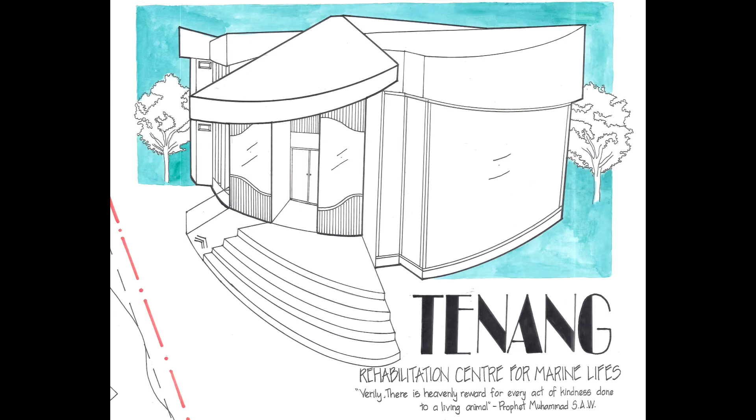The name Tenang Rehabilitation Center for Marine Life is chosen to represent the site content itself, as it's very calming and serene for us to visit and care for endangered marine life such as turtles. Based on what Prophet Muhammad has said, verily there is heavenly reward for every act of kindness done to a living animal.

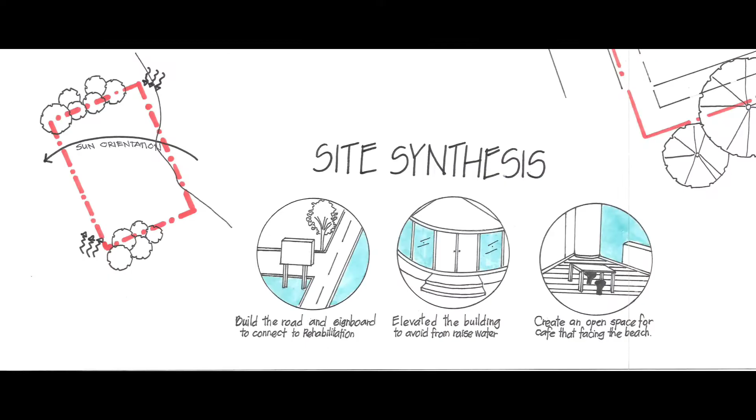Moving on to the site synthesis, as our site is in a rural area, I suggest building the road and signboard to connect to the rehabilitation center. Next, elevate the building to avoid rising water damage, as our site is near the beach. Then, create an open space for a cafe facing the beach to get the beautiful scenery.

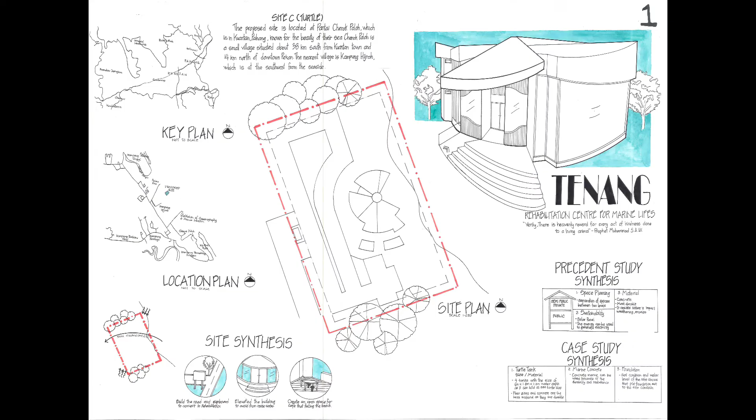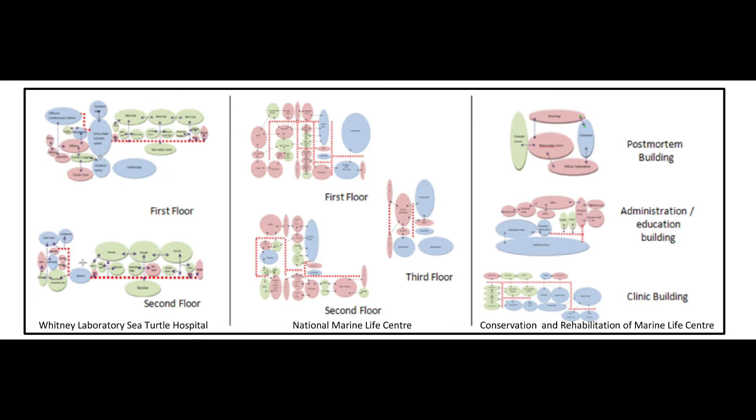Moving on to the precedent study synthesis, based on 3 buildings I've studied, which are Whitney Laboratory Sea Turtle Hospital, National Marine Life, and Conservation and Rehabilitation of Marine Life Center, I came out with 3 syntheses. Firstly, on space planning, separation of space between 2 levels, where public space is on the ground floor and semi-public and private space is on the first floor. This is needed because of privacy.

Secondly, in terms of sustainability, solar panels can be used to generate electricity. Then, for the material, concrete can be used because it is most durable and resists nature's impact.

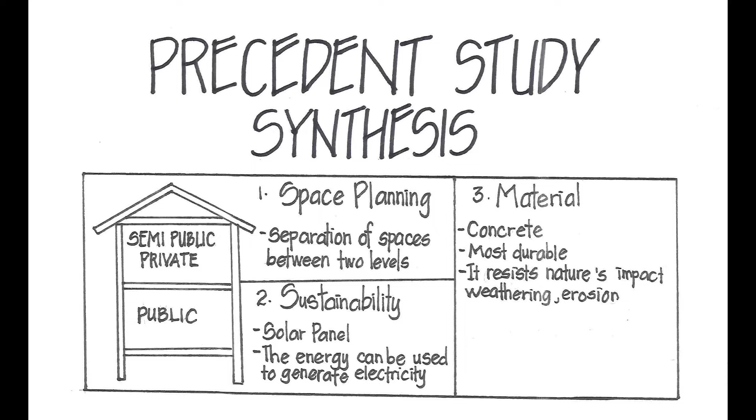For the case study synthesis, firstly, on the turtle tank size and material, I found that 4 tanks with the size of 6 meters by 1.8 meters by 1.2 meter water depth can hold all sea turtle sizes, and fiberglass and concrete are the best materials as they are durable.

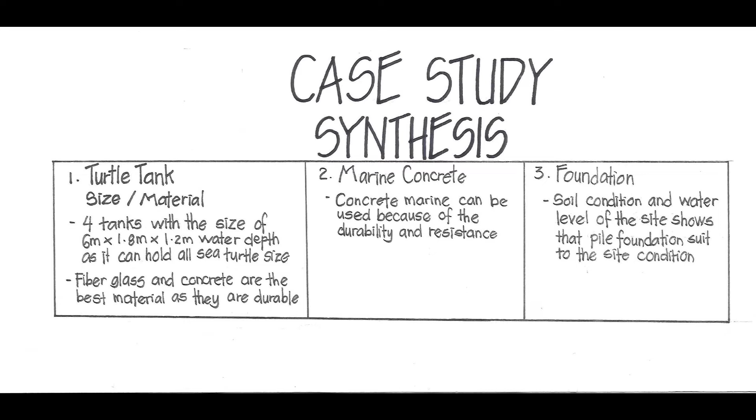Secondly, marine concrete can be used in this building because of its durability and resistance. Then, for the foundation, the soil condition and water level of the site show that pile foundation is suited to the site condition. Moving on to the concept.

My concept is motion of nature. Motion is the phenomenon in which an object changes its position over time. It can be described in terms of displacement, distance, speed, and time. Almost all living things naturally move and change in some way.

For instance, creatures like turtles will release their babies to the sea, and they will come back to their hatching place after a moment, which takes almost 2 years if they survive. The nature of movement includes various types of motion, such as rotary and oscillating. Briefly, motion of nature can be defined as the movement of natural elements such as turtles, birds, waves, trees, and many more.

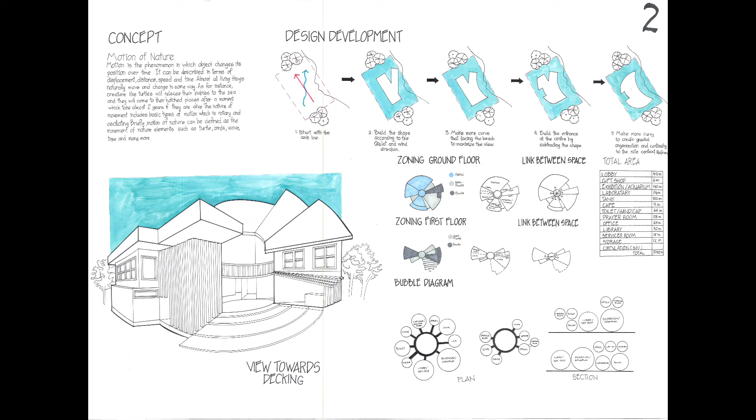Then we look at how I got my design through design development. Firstly, I start with the axis line of the wind and also the Qiblat direction. Then build the shape according to the Qiblat and wind direction.

Third, make more curves facing the beach to maximize the view. Fourth, build the entrance at the center by subtracting the shape. And then make it more curvy to create spatial organization and continuity with the site context.

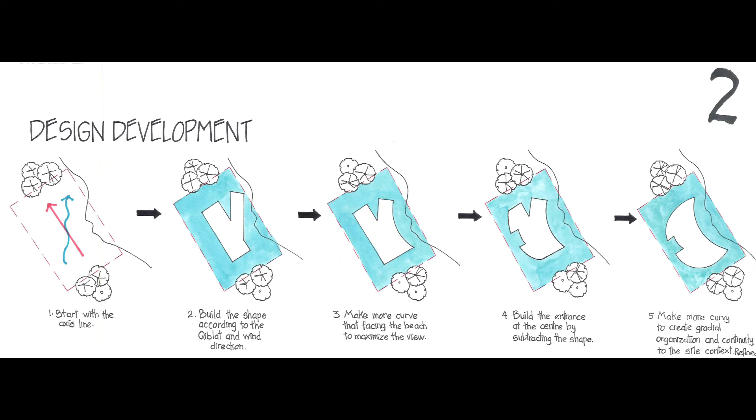And then try to refine. Next, for the zoning, blue color represents public space. Most of the public space are on the ground floor, while private space is on the first floor. Based on this bubble diagram, exhibition space, lobby, cafe, tank, lab, and toilet are on the ground floor.

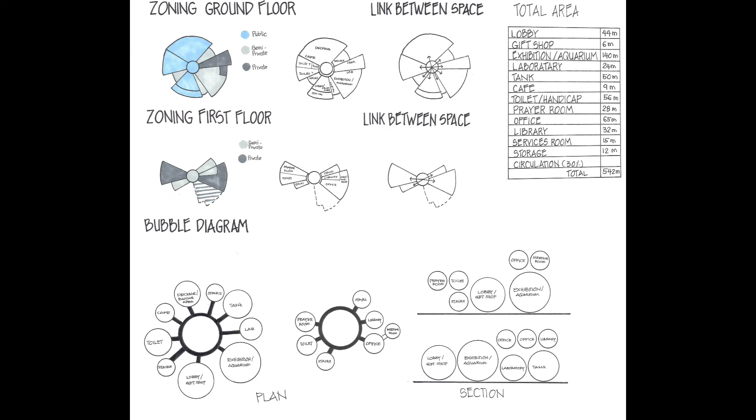Administration office is on the first floor. The total build-up of this building is almost 542 meters. Moving on to the ground floor, this road is only one way, and also a post guard for our rehabilitation center for security. Visitors can park their car and motorcycle on the left side, or they can drop off the passenger first, then move around and find a park again.

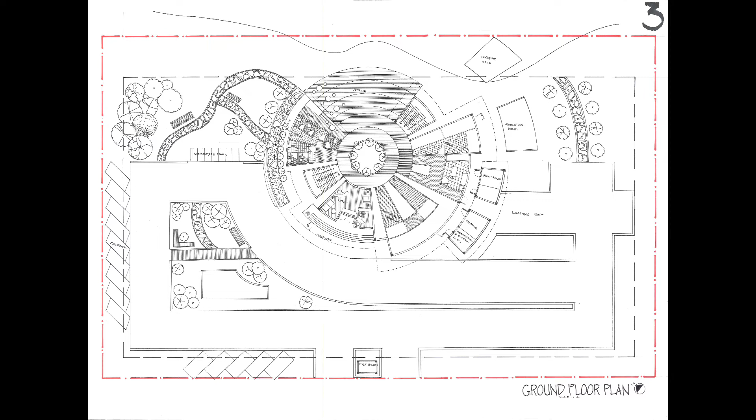Visitors will meet the lobby first at the entrance and also a gift shop to buy souvenirs. As you can see from this plan, it creates a radial organization as people can meet the exhibition and aquarium space on the right side. They can also see the process of curing the turtle in the laboratory from outside. Then they will meet the turtle tank and also the stairs to reach upstairs.

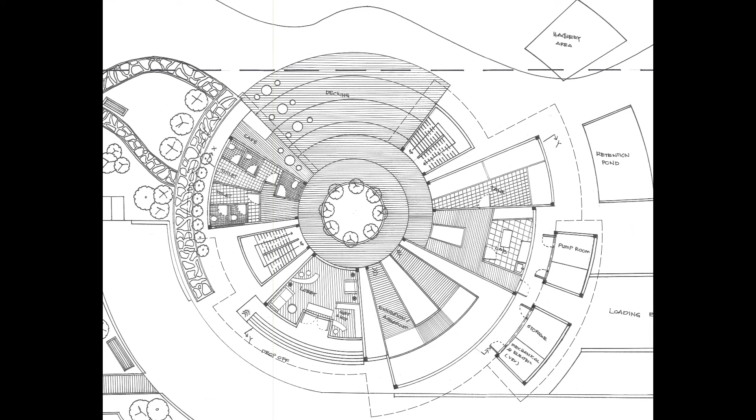On the left side there is also a cafe and eating area facing the beach. Visitors can rest while eating and looking at the beautiful scenery. Then there's a toilet and also a handicap facility. There are 2 stairs in this building for emergency cases. On the right side there is also a loading bay and services room.

For the first floor plan, as mentioned before, it is for the administration office. There is also a library for researchers to do their research, and on the left side there is also a toilet and prayer room.

Moving on to the section cut X-X, what we can see is the height and landing of the ramp of the walkway in the aquarium, and on the left side is the toilet, while section cut Y-Y shows the lobby, turtle tank, library and meeting room.

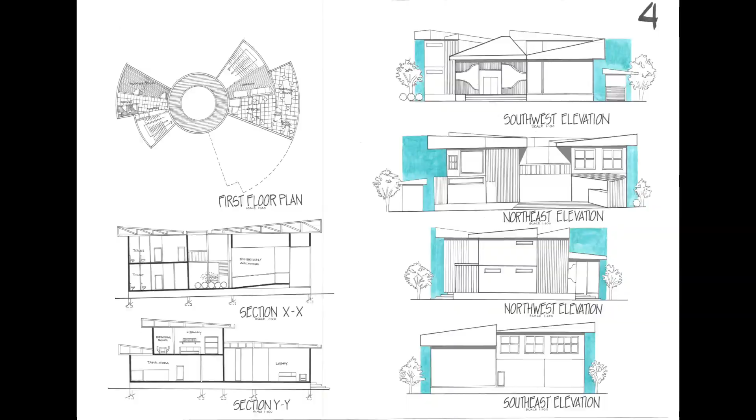On the right of the board, it's showing the elevation of the building. Southwest elevation shows the entrance of the building at the center. Northeast elevation is the facade facing the beach, while northwest and southeast elevations are from the side of the building. Then for the next board, it's showing sketches of the view towards the lobby and aquarium.

On the right side are the construction details. I would like to suggest using concrete for the wall, reinforced concrete for the column, and micropile for the foundation, and it will also refer to the engineer's details.

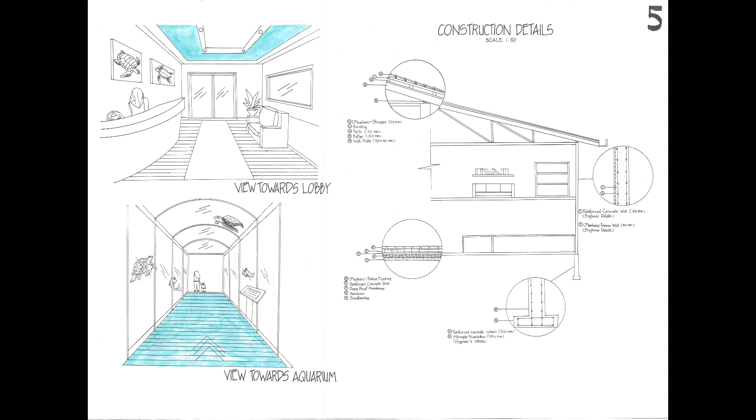For lighting design strategies, for the cafe I suggest using suspended lighting or recessed indirect lighting, using an incandescent bulb because it can help give a relaxing mood to the space. In addition, it also saves energy usage. By creating an open space for the cafe, it can save the bills for electricity.

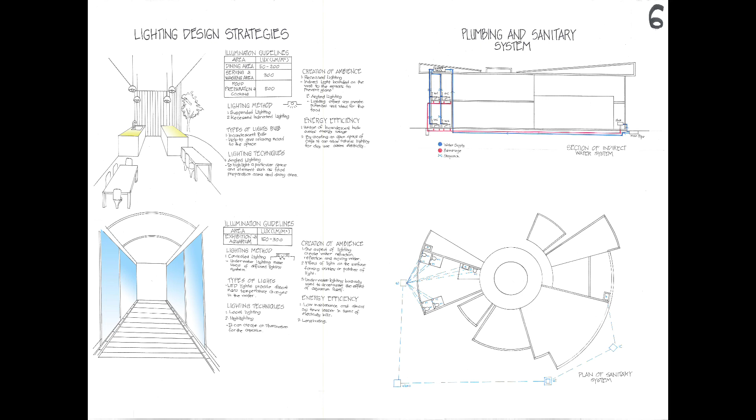Then for the aquarium, concealed lighting can be shot to the underwater aquarium as it creates water reflection and moving water. Last but not least is our water supply system. I suggested using an indirect water supply. The specialty of using an indirect supply system is if water shortage happens or stops during a certain time period, water can still be supplied to the users from the storage tank.

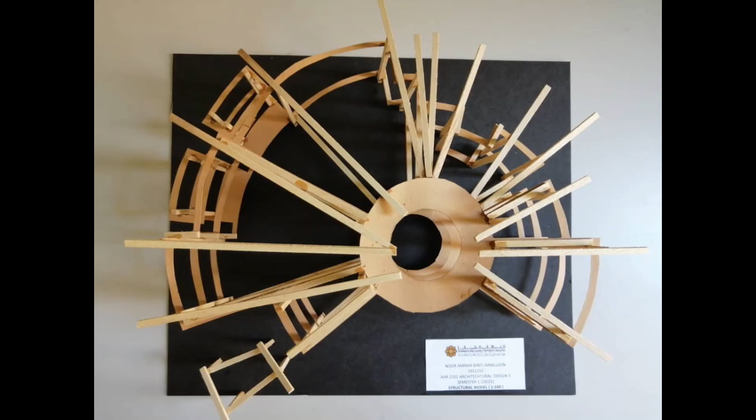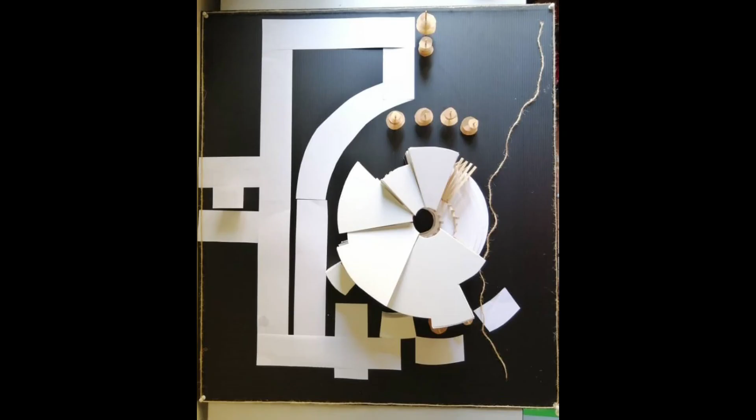Moving on to the models. So here is the conceptual model, structural model, and building model with the site context.